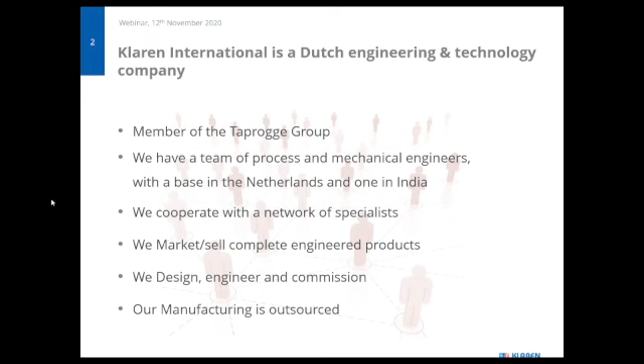To start with, what is in fact the topic of today? The topic of today is fouling, our technology to solve fouling, fouling in evaporators, and how to integrate our technology into these evaporators. What is then the problem that we want to solve?

Well, in fact, you can see that in these pictures. Here you see the fouling occurring on the evaporator tubes of a forced circulation evaporator, which was part of a multi-effect evaporator that treated the wastewater coming from a dye-stuff producer in India.

As you can see, this fouling was really substantial. Thick layers developed in the tubes, sometimes complete tubes were clogged. On the tube sheet too, you can see a lot of dirt agglomerating, which even blocks the tubes. Overall, this led to a very dramatic decrease in evaporation capacity.

This is just one example, but in general, fouling will always reduce the evaporation capacity of evaporators. It also means that if you design an evaporator, you have to think about which fouling or heat transfer coefficient to use, and you need to incorporate a fouling factor that compensates for the loss in heat transfer.

And when doing so, of course, the area that you require for an evaporator or heat exchanger bundle will increase, so you end up oversizing the equipment.

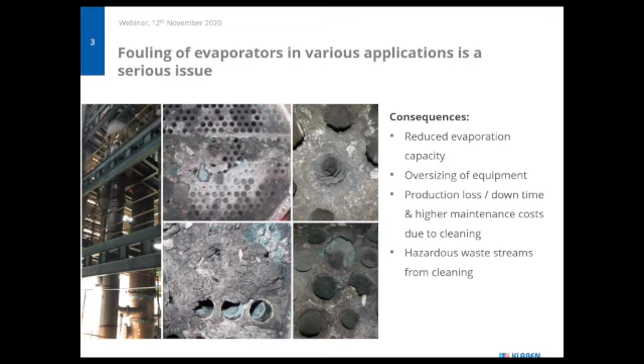Operators want to run the evaporator without continuously cleaning it. They want to make maximum use of the equipment they have purchased. Our technology is a solution to overcome this fouling.

Our technology provides a continuous, online and inline cleaning mechanism within the heat exchanger tubes. Since we talk about evaporators, in this presentation and for our technology we focus on the forced circulation evaporator, which is widely used and is the preferred choice if you already expect fouling.

In this forced circulation evaporator, we can integrate our technology in the vertical tube bundle, because we need the vertical orientation to get proper fluidization. Fluidization, the use of cleaning particles in the tubes of the heat exchanger, is the core of our technology. We feed those particles, as you can see in this animation, to the inlet of the heat exchanger.

In this inlet channel, which is the bottom circle you can see here, we distribute the particles over all the tubes. These particles are taken upward with...

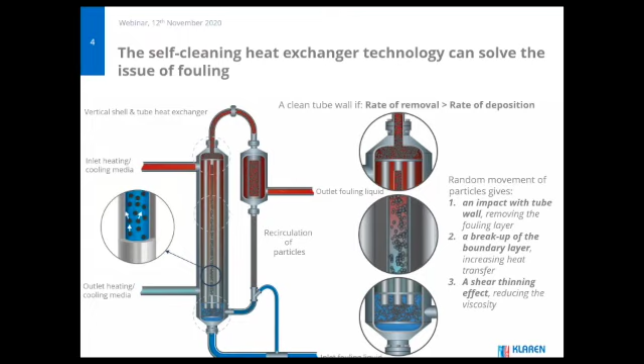If you look at examples of our system, it's not only that you can use the self-cleaning system with a fluidized bed for evaporators, but you can use it for all kinds of heat exchangers. In this slide with 4 examples, you see 2 of them which are not related to evaporation but to different applications. The right top is the production of a proprietary chemical.

In the USA, this system has been in use already for a long time, more than 25 years in operation, with many operating hours. Before they installed the self-cleaning system, they had to clean it more than once per week. After installing the system, the number of cleanings went to zero.

In this application, the fouling was caused by a waxy, sticky deposit that created strong layers, which led to these cleanings. After installing the system, the performance was really to the satisfaction of the customer.

The bottom right example is the heating of a zinc phosphate solution. This application is in an industry where they coat metal parts with a zinc phosphate layer, because this gives protection against corrosion.

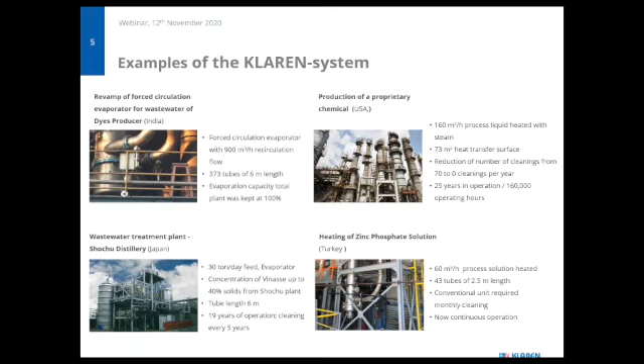As said, I will come back to both in the course of this webinar. So, the fluidized bed technology as a self-cleaning, online and inline cleaning system can be applied in many applications, and that can go as far as the removal of ice from tube walls.

Now going into more detail on the integration of an evaporator, the implementation of the self-cleaning technology in evaporators. I will show two cases: one is a new build case and the other is a revamp case. They each have their own characteristics and dynamics, because in a new build you can design from scratch and make all the choices you want, but in a revamp you have a lot of limitations.

The first case is an evaporator used in Japan to treat wastewater coming from a distillery. In this distillery, they made the alcoholic liquor called shochu. After this distillation, wastewater is left that contains organics and salts. Already up front, they said fouling would be substantial, so they wanted to see if they could apply the self-cleaning technology.

And they did so from new build onward. It was chosen to use a single effect evaporator with TVR. That's not the most beneficial choice in terms of steam economy, but they chose to have only one effect. If you have one effect, the only way to improve steam economy is to apply a TVR, which they did. This TVR also created a light vacuum in the vapor liquid separator.

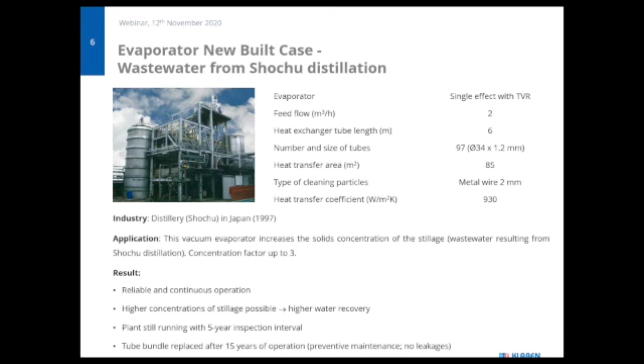They run with a concentration factor of around 3. In fact, they could go higher, but for them at this moment it's good enough. But of course, there is a benefit if you look at evaporators. What is the use of an evaporator? You want to recover the water from a waste stream. So if you can go to higher concentrations, which we can, your water recovery will be higher. So this is, in fact, the new build case.

Then going to the second case, and this is the revamp case. What is our approach behind a revamp? Well, maybe first to start with, why would you consider a revamp?

Well, I think that's rather logical. Suppose you already have a multi-effect evaporator plant, and you know that in one of the effects you have substantial fouling issues. The best would be that we can change the existing system and not offer a complete new one, because changing it will, in most cases, be a lot cheaper than building something new. So the advantage is you simply have a lower capital investment, since we will reuse some of the parts, and the most expensive part is of course the tube bundle itself.

So if we look at the revamp, we will always look to reuse - that's the starting point - the available heat exchanger, the available bundle. The next thing we will do when we assess such a situation is look at the performance, the process perspective. Why? Because of course we want the capacity of the unit to not change, so it can still evaporate the same amount of water or more, but definitely not less.

So we analyze the existing installation, the existing performance as it is, as in the as-is case, and then we make our calculations to show or prove that with our technology we can get the same heat duty of the heat exchanger, or even improve it. So that's the thermal evaluation that we make.

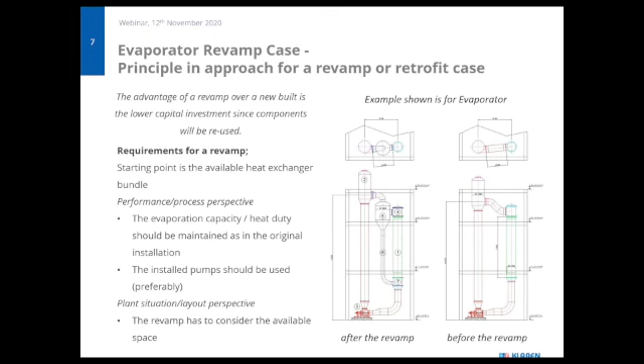We did this for the first project we have done in India. This was the first effect of a 4-effect multi-effect evaporator plant. The pictures shown earlier were from this plant. It was cleaned every 4 weeks, with almost dramatic fouling. The fouling came because the effluent contained calcium sulfate with some other salts in combination with organics, leading to very hard fouling and a very thick layer with a strong effect on evaporation capacity, but you will see that in the next slides.

So we revamped this to the self-cleaning configuration, and the revamp in this case was rather easy. Why? Well, we were a bit lucky that the existing heat exchanger had a 3-pass arrangement of the tube bundle. As I said earlier, we use lower tube velocities, which effectively means your flow would reduce. To get the same evaporation capacity, you need a bigger delta T over the tube, but also less length in the tube. So effectively what we did is convert the 3-pass into a single-pass arrangement, giving 3 times the number of tubes for the flow to go upward. We reduced the velocity by a factor of 3, so effectively we got the same flow, the same delta T over the tubes, and had the most ideal configuration for a revamp.

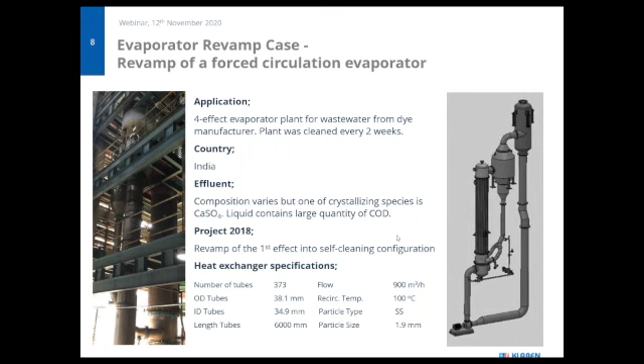So what was the result of this revamp, which of course is most crucial from the customer perspective, but also for us, because at the end KLAREN is only interested in doing good projects. We're not interested in delivering a system and then the client just can't see us, but we want to be involved in the plant performance, just to assist. Because in a multi-effect evaporator, fouling might not occur in the first or last effect, but in an effect which is not equipped with self-cleaning. But still, there are things we can do to improve the situation.

In this figure, the blue triangles show the evaporation capacity as it was before the revamp, before the retrofit. You can see that within 300 hours, the evaporation capacity dropped by 50%. So within 10 to 12 days, this evaporation capacity really went down dramatically.

After the revamp, shown in the red triangles, the evaporation capacity of the plant has remained constant. And that, of course, is exactly what the intention was behind the project. But since it's a multi-effect evaporator, you always have to watch what the other effects are doing. You see some fluctuations in the points - that's because the data is raw data from the plant, so we did not manipulate it in any way, and because it's daily averages, there is some fluctuation in the recordings.

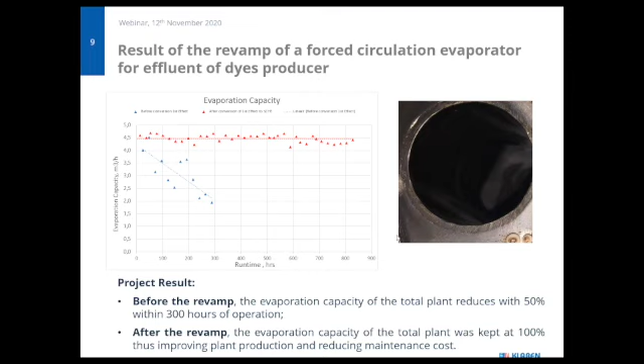So we've just shown you two applications, one new build, one revamp, of the integration of the self-cleaning technology in evaporators. Maybe now some more specific words about, first, the multi-effect evaporator plant, and second, an evaporator plant using MVR.

But I will start with multi-effect evaporators. Most people will know you use multi-effect evaporators to increase steam efficiency, because you put a lot of energy into the conversion of water from liquid to vapor, and energy use is always money. So you want to make maximum use of this energy, and you can do that by using the vapor generated in one effect as the heating medium in the next effect, by having a cascade of pressures.

Then you call it a multi-effect evaporator plant. Academically, you could use many effects, but in practice 4 to 5 effects is about the maximum. The vapor coming from the last effect is then condensed in a condenser, and that's where you essentially kill the energy.

To further boost steam economy, you could use a TVR in the first effect, or from the first and second effect, and take some of the vapor. You use a thermal compressor to upgrade this vapor using fresh steam, and the net effect of using a TVR is the same as adding an additional stage in your multi-effect evaporator plant. So you see it quite a lot.

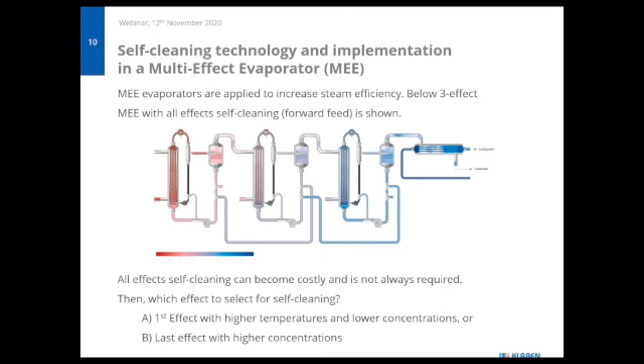This was the multi-effect evaporator plant. Then another possibility is to combine self-cleaning technology with the MVR principle. What is MVR? MVR stands for mechanical vapor recompression, sometimes also called mechanical vapor compression - that's a bit of a synonym.

But the core principle is that you take the vapor generated from the evaporation, and you upgrade it in terms of pressure and temperature using a compressor. Through the compressor, the pressure is changed, and the outlet discharge pressure is higher than the inlet pressure, and because of this, the temperature is also higher. That's where you create the driving force to use this vapor on the shell side of the heat exchanger that you use for evaporation. So you use all the vapor that you generate to condense again.

Effectively, you recirculate this energy. What you do need to do is upgrade this vapor in pressure, and you need electrical energy to do this. So the main energy input to this installation is electricity that goes into the compressor.

Since you use all the vapor from the first effect, which is the only effect, and condense it, only one effect is required. And that has the positive implication that there's no discussion anymore about which effect to equip with self-cleaning, because there is only one, and this one will be equipped with self-cleaning technology. So that's very beneficial from that perspective.

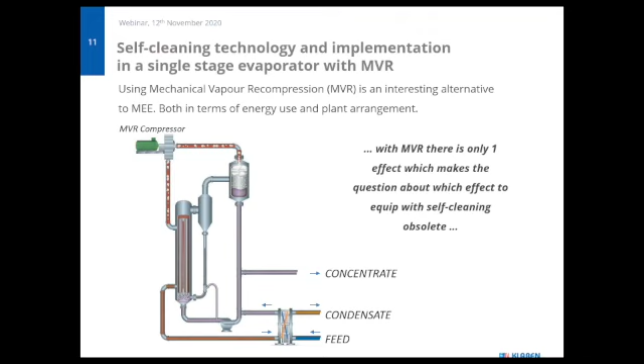Just using engineering equations, you can calculate how much energy you need to evaporate 1 kg of water. In a multi-effect evaporator, you would need around 0.3 kg of steam, but you also need to drive all the motors of the recirculation pumps in the various effects - that's the electrical energy use you have.

And if you calculate this the same way for an MVR - how much pressure you need to increase the vapor, using the equations for a compressor, you can calculate how much electrical energy is required - you get an energy use of 0.06 kilowatt-hour per kg evaporated.

So that's not even much higher than the electrical energy you already have in an MEE. But if you convert both energy inputs into primary energy, being coal - this is quite common in India - you can use coal in a boiler to generate steam for the multi-effect evaporator, or use the boiler or coal in a power plant to generate electricity. Using known power plant or boiler efficiencies, you can calculate how much coal you need to evaporate one cube of water.

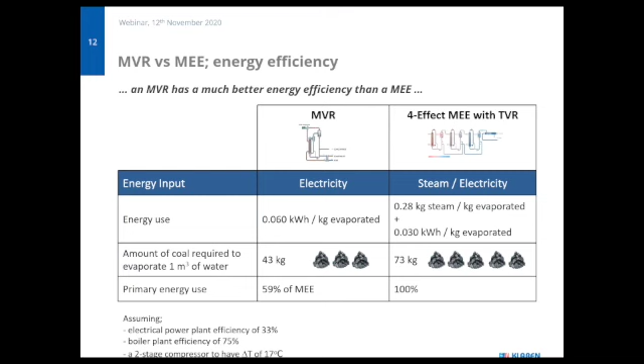Still, you talk about rotating equipment, and many people fear rotating equipment in that sense. So MVR still has to earn its place in the market, especially in India. But that's also, in my opinion, because some systems are not properly designed. Let's say that's too much detail for today's presentation, but you have to really be careful that the energy balance in an MVR is okay. I will say something about that later.

Based on this, some important selection criteria and design parameters for both MEE and MVR. MEE is a straightforward system, but you need to look at steam economy, which you can optimize. It's also important to carefully select which stage to equip with self-cleaning technology, considering forward versus backward feed.

If you look at MVR, it involves rotating equipment and care, so that's important to consider. It's also important to balance heat transfer area and compressor ratio. With a higher compressor ratio, you use more electrical energy but get more driving force and can use a smaller heat exchanger. Or you lower the compressor ratio, use less electrical energy, but need a bigger heat exchanger - so that's the CAPEX versus OPEX question.

The last point is that an MVR requires a positive energy balance, meaning the energy in the condensing vapor needs to be used for evaporation. But if you lose energy - for example because insulation of your plant is not good, or your preheater is not functioning correctly - you lose too much energy and get a cascade that goes down, because you can evaporate less. You have your blower, it condenses in the heat exchanger, you lose too much to heat loss and preheating, and again you can evaporate less, so that circle only goes down. You require a positive energy balance.

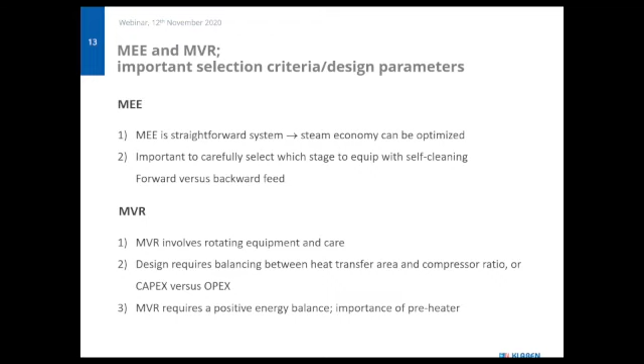If you want to know more about that, please raise the question, and we can have communication on this later.

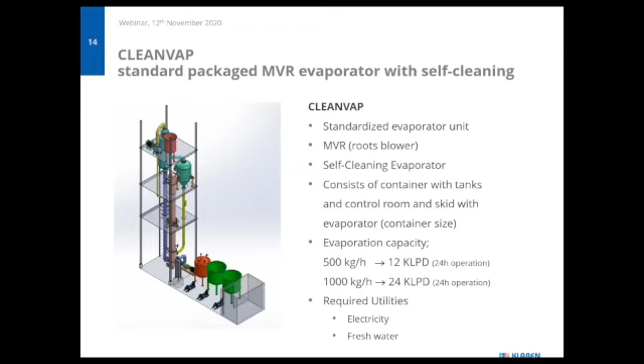In the last part of this webinar, some words about the business case of the self-cleaning evaporator. The most important factor, we think, is the evaporation capacity itself. Because if you buy a unit designed for 2 cubes per hour of feed, and at the end you can only do 1 cube per hour, you've paid for something you don't get. That effectively happens with a plant that has fouling, because evaporation capacity starts at 100%, and within 28 days in this example - which can vary per client - it goes down to 50%, repeating itself after the plant is cleaned. If you take the mathematical average, this plant only achieves 60% of design.

On the other hand, if you have a plant with self-cleaning, which is what we aim for, it remains at 100% of design. This is a huge difference in capacity, meaning the self-cleaning version can already be 1.5 times as high and still have the same CAPEX cost per cube.

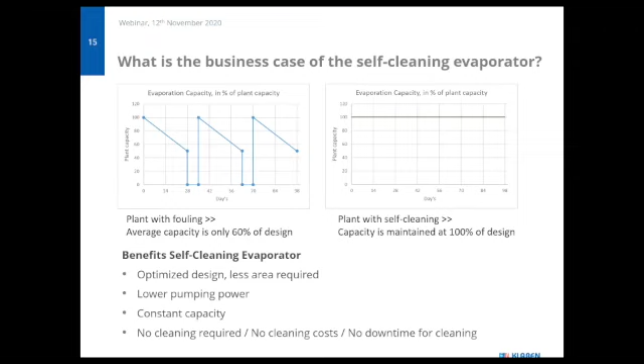But there are also other benefits, because with self-cleaning - as I will show you in a while - you can have an optimized design, meaning you need less area. You can reduce pumping power. As said, you have constant capacity, and there's no cleaning required, so no cleaning cost and no downtime for cleaning.

Optimized design, what do I mean with that? Well, this is just an example, and later we will also provide a calculator on our website to calculate simple MVR units. In this slide, the aim is to show the difference in design between a self-cleaning arrangement versus a conventional heat exchanger arrangement. So let's start with the feed concentration.

In this example it's 2 cube per hour, and we want to concentrate from 5 to 30%. Then you can already calculate that your evaporation rate will be around 1720 kg per hour. I've assumed we evaporate at atmospheric conditions, 100 degrees centigrade, and the vapor, either from fresh steam or fresh steam combined with a TVR, is 117 degrees. So you see a difference of 17, but you have to consider boiling point elevation, which will reduce the driving force.

You can use this to calculate how much heat transfer area you need, how big the heat exchanger needs to be - the same calculation applies for both the self-cleaning and conventional heat exchanger. For self-cleaning, we always have a single pass, so I've assumed a 6-meter bundle. The heat transfer coefficient is 1300 watts per square meter Kelvin, and from these numbers you can calculate that the heat transfer area is around 90 square meters.

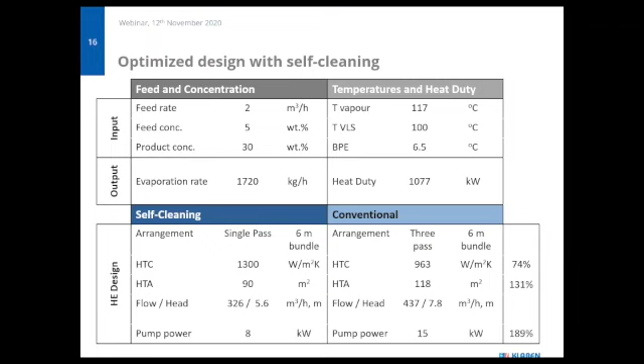Looking at flow, since it's a forced circulation evaporator, the flow is high, but in our case it's smaller than for conventional, and the head is also smaller because we only have a single pass with the fluidized bed. But with 3 passes and a total tube length of 18 meters, you get a substantial pressure drop of 7.8 meters, which converts to pumping power. Our pumping power would be around 8 kilowatts versus 15 kilowatts for conventional. So there's also a benefit in going for self-cleaning.

So, ending with some conclusions. Evaporators with self-cleaning offer operation with constant capacity and no need for cleaning, as said - clearly this is desirable. The design is optimized in terms of heat transfer area and pumping power, and you can integrate it in both multi-effect evaporator plants and MVR plants - both are possible, and we don't really have a preference. Of course, from a world sustainability perspective, using less energy is preferred.

But local circumstances can really make you take a different decision, and that's understandable. And to end, we don't always need to build a new plant - we can revamp or retrofit existing plants, but it requires a professional approach, which we do through a feasibility review.

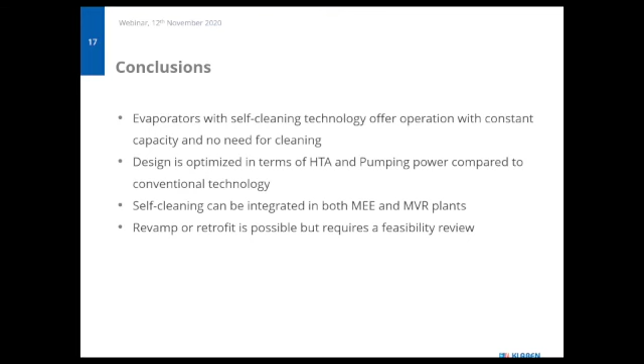The last thing I want to announce after these conclusions is that we've prepared a calculator which you can use to calculate an MVR based on the conventional heat exchanger design and on the self-cleaning design. This will be made available on our website, so you can make your own calculations to see how designs should look, and even use it to compare designs from different vendors.

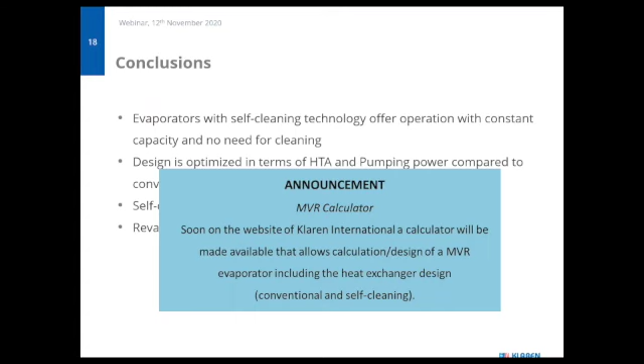So we have gotten some questions, let me select some of them. What if particle entrainment happens? I guess this focuses on the particle separator.

We separate based on gravity, which is the well-known technique. But of course, it's not 100% proof that no particle can leave. So we have done substantial CFD calculations showing that our design has very good effectiveness. Even if the flow goes to 175% of the normal flow, still no particle would leave, so we are quite confident that this design is safe. The benefit of a gravity separator is that it is robust, meaning there's no sieve that can get clogged, so that's really a positive.

Another question is if it's possible to use this in thin film evaporators. I interpret this question as referring to a falling film evaporator. In fact, that's not possible because we need a forced flow in the opposite direction with the tube fully filled. What we've done is convert a falling film evaporator into a self-cleaning one, but by doing this we've also converted it into a forced circulation evaporator. We had to change the tube bundle, but we reused the tubes - took the bundle, removed the shell, cut out the tubes, and reused them in a new bundle.